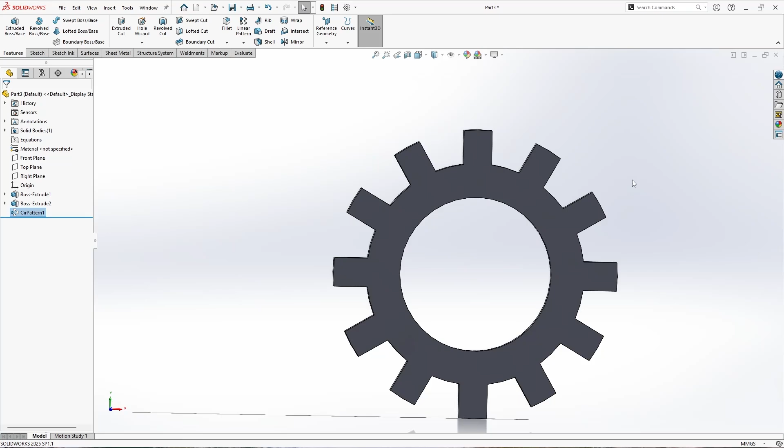In this video, I will show you how to model an external tooth lock washer step by step in SolidWorks. This video is divided into two sections. First, I'll give you a quick step by step on how to make an external tooth lock washer, then we'll move to an uncut session so you can follow along in real time.

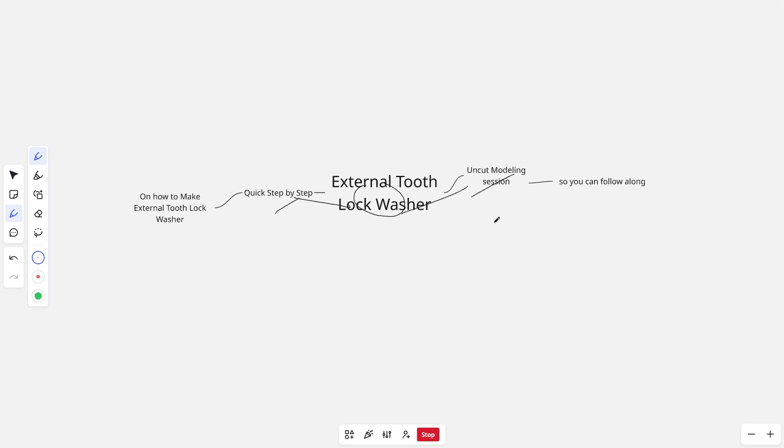First, create a new part and start a sketch on the front plane. Next, draw 3 circles that will act as the base outlines for the washer. Then apply dimensions to all 3 circles to define their exact size. After that, convert the outermost circles to construction lines. Now let's bring the 2D sketch into 3D.

Use the extrude feature, set the direction to midplane, and enter a thickness of 0.55 mm. Before sketching further, change the view style to hidden lines removed, to make it easier to focus on the sketch. Create a center line starting from the origin.

Then draw a circle that is collinear with the middle circle of the base sketch. Now draw another circle and give it a diameter of 12.2 mm. Next, add a horizontal center line from the tip of the previous center line outward to the outer circle. Then add 2 angle center lines to define the size of the tooth profile.

Make these 3 center lines symmetric to keep the tooth profile balanced. Now apply a dimension for the angle between the center lines to control the tooth spacing. Draw a new center line that intersects the left angle center line and the base circle.

Create a horizontal line that touches the circle and intersects the vertical center line. This defines the base of the tooth. Make sure both slanted lines you drew have the same length by applying an equal relation. Now sketch the 2 slanted tooth profile lines that connect your base and top edges.

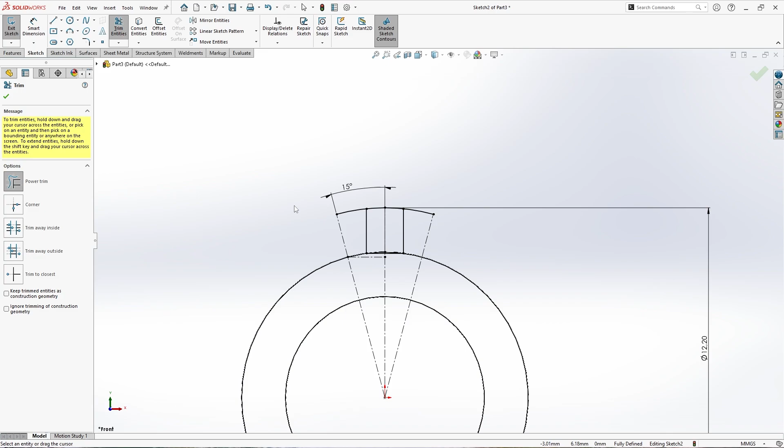Use trim to remove any unnecessary sketch lines so you're left with a clean tooth profile. Extrude the tooth profile to turn it into a 3D feature. Now use the circular pattern tool, select SS1 as the direction, and replicate the tooth all around the washer. And finally, apply a material to the external tooth lock washer.

Alright, now let's move on to the uncut session so you can follow along in real time.